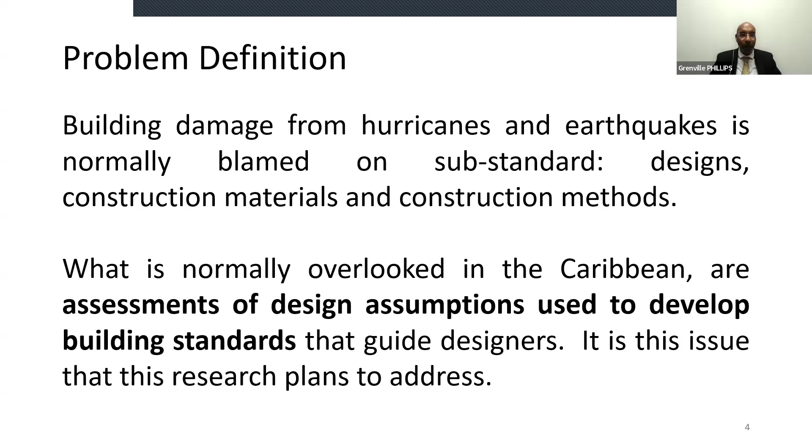Over the past 30 years, there have been several hurricanes and major earthquakes that have impacted masonry walls and houses in the Caribbean, and there is now sufficient data to identify critical design assumptions that may have inadvertently resulted in significantly under-designed buildings.

Then you have to identify the aim. What is it you're trying to do at the end of all of this? My aim was to propose design recommendations to reduce the structural vulnerability of masonry houses in the Caribbean to damage from hurricanes and earthquakes. And you must know there's a lot of advice given in the codes. So this was my aim.

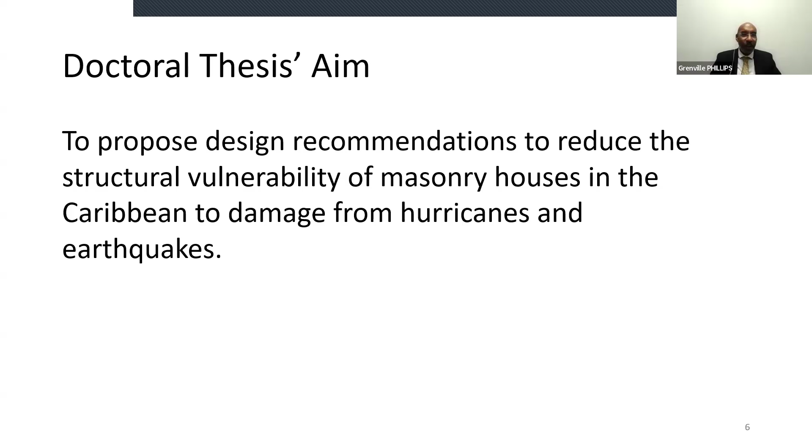Then you have to explain what method you plan to use to achieve that aim. Critical design assumptions were identified during damage assessments following recent extreme events, and they are the basis of the 4 research projects that comprise this thesis.

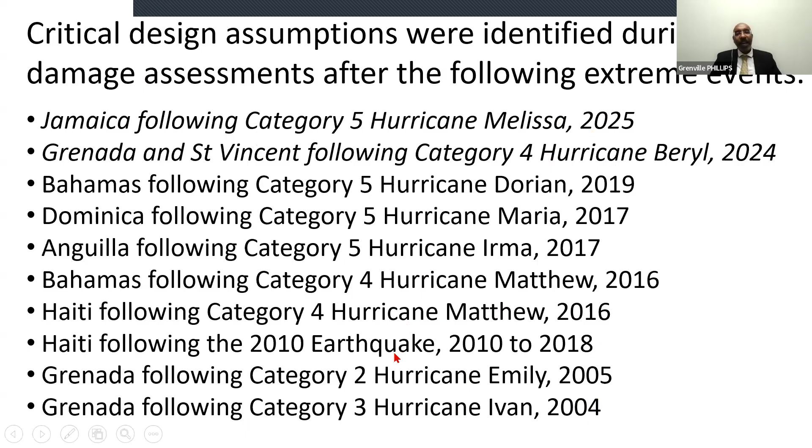I've started doing damage assessments from hurricanes in 2004. The last two are in italics because this happened after the doctorate, but those are the ones that I assessed. So it's quite a body of evidence that I can use for the doctoral program.

Since you're doing a set of research papers, essentially, they have to tell a story. So you then develop some story. Why question design assumptions?

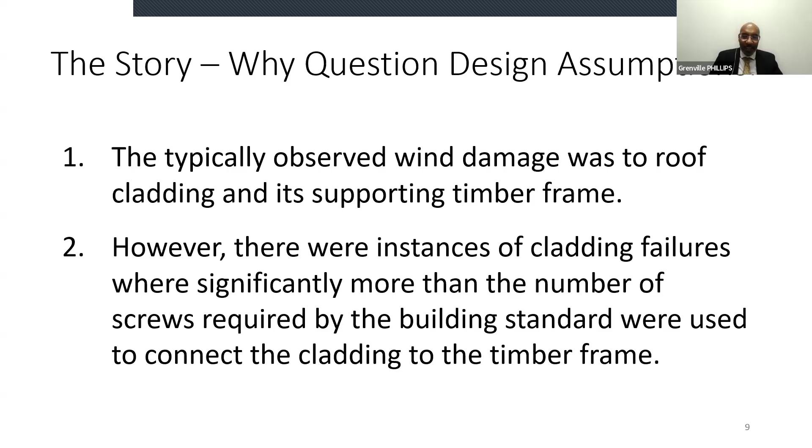The typically observed wind damage was to roof cladding and its supporting timber frame. However, there were instances of cladding failures where significantly more than the number of screws required by the building standard were used to connect the cladding to the timber frame. Here's the example - this is a school. It still had the ceiling in under the gable end, but screws at 3-inch centers. So more than that is required.

Such evidence suggests that in addition to examining construction errors and structural engineering design errors, the assumptions used to determine the structural design of the cladding and timber frames should also be examined. Since persons normally build what they can afford, the assumption that building a house roof to survive a Category 5 hurricane is generally unaffordable to homeowners should also be investigated. So I'm sort of telling the story of why I'm looking at cladding and looking at timber frames and also looking at affordability.

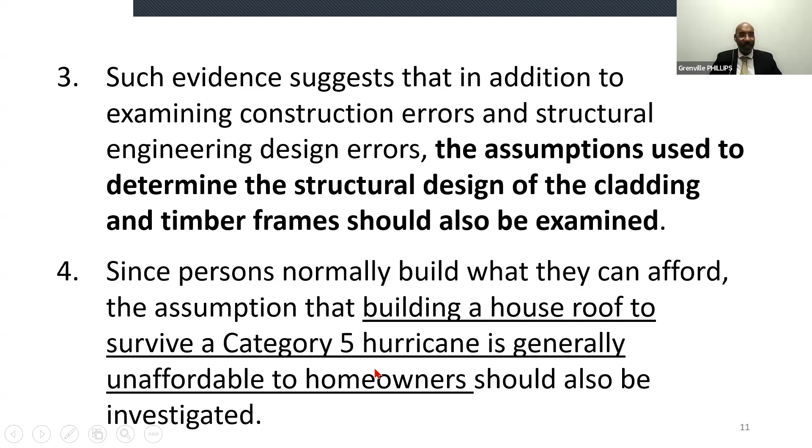The typically observed earthquake damage in Haiti was to unreinforced masonry walls. The type of masonry constructed was generally unreinforced confined masonry. Given that both confined and reinforced masonry are used in the Caribbean, and that confined unreinforced masonry is being promoted as the superior masonry solution to seismic loads, both methods' response to seismic loads should be examined.

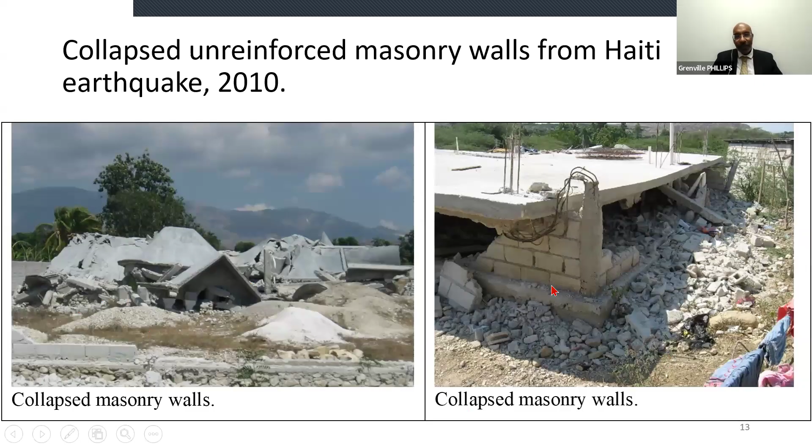So this is Haiti, where walls collapsed - they were unreinforced. And here, collapsed unreinforced masonry walls, they did have these column stiffeners, but still the walls collapsed.

The design assumptions I came up with are: hurricane wind loads can be applied statically - that's a design assumption in our codes. Second, hurricane wind loads are of short duration, as stated in our codes. Third, the construction cost of timber frame roofs to survive known Category 5 hurricanes is unaffordable for most homeowners, which was almost common knowledge when I was doing the doctorate. Fourth, confined masonry performs better than reinforced masonry under seismic loads, as stated in their codes.

To test these assumptions, the research was divided into 4 work packages, which are the thesis's research projects. I'll go through them. This is research project 1: dynamic wind loads on roof cladding. That's the title. Then you list the design assumption: dynamic loads on cladding can be applied statically by applying an increased factor.

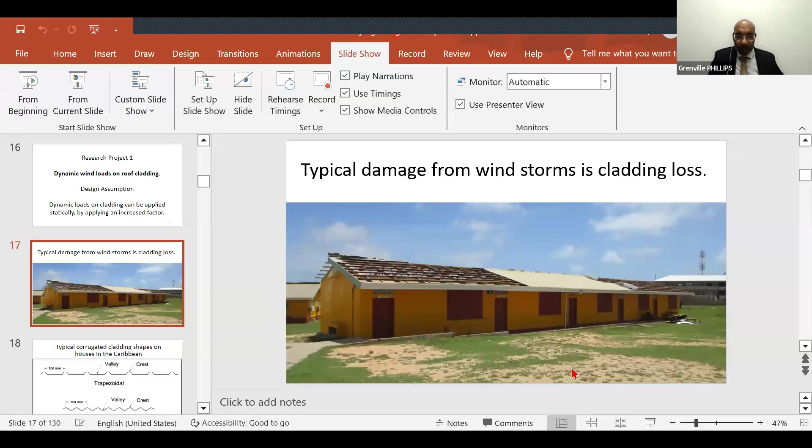The understanding is that a wind load is applied as a wind pressure against a wall. To deal with the dynamic wind loads - dynamic wind loads are usually gusts - that dynamic load is applied statically by applying a factor to your load, usually a factor of two. Still applied statically, not dynamically. So there's basically a doubling of the load.

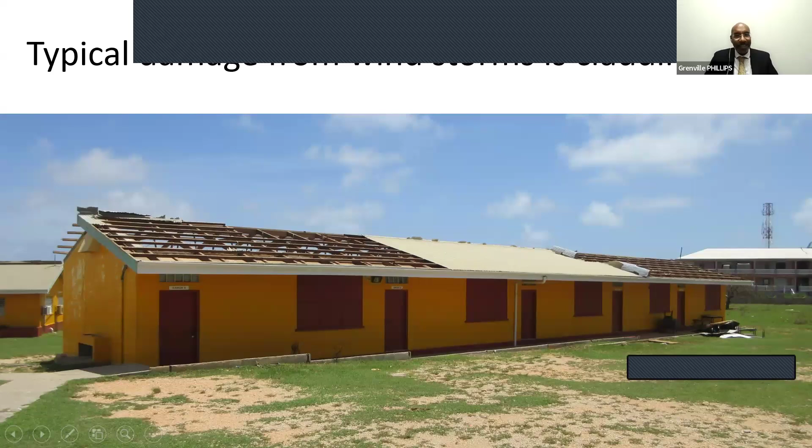The method: damage predicted from an equivalent static application of loads came from wind tunnel tests described in the American Society of Civil Engineers standard ASCE 7-16, done in 2016, was compared with actual damage from Category 5 hurricanes. So we're comparing the predicted from the code to the actual from an actual event. The predicted damage was to the high pressure end zones of the roof and to the cladding. Possible explanations for failures significantly above those predicted were identified and assessed for their likelihood.

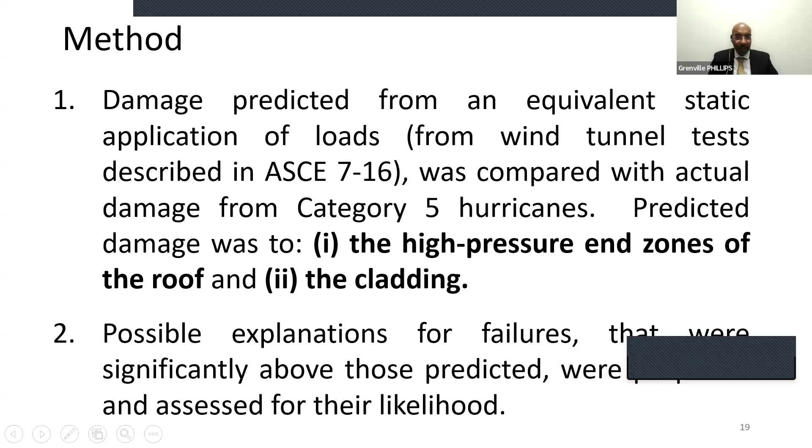Looking at the high pressure end zones - this is a gable-shaped roof. According to ASCE 7, we have an interior area which attracts some high wind pressures. Then we have the ridge, the eave, and the gable end, which attract higher wind pressures. And then we have these areas in black that attract the highest wind pressures.

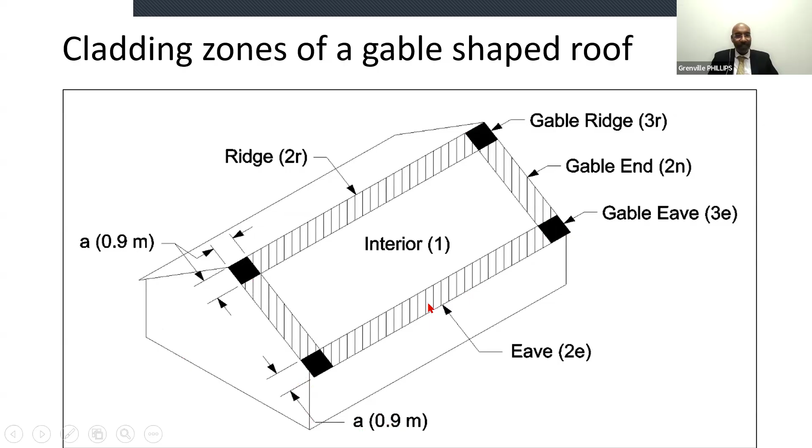To identify the dimensions of these areas is A. Once the width is less than 9 meters, A is 0.9 meters. So we know what the areas of high pressure are, and therefore you attach more fixings, more screws to those areas. For the frame, the timber frame, the area is 2A - that's the area of higher wind pressure.

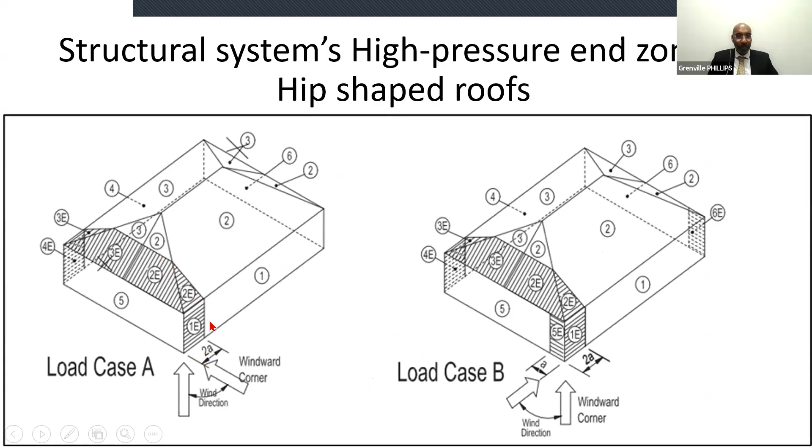In a hip-shaped roof, again 2A is the area where the higher wind pressures are. These figures show a 2A dimension width of a high pressure end zone of the building. The least horizontal dimension of most houses in the Caribbean is rarely more than 9 meters. Therefore, most houses will attract an A value of 0.9 meters, resulting in a minimum end zone width of 1.8 meters.

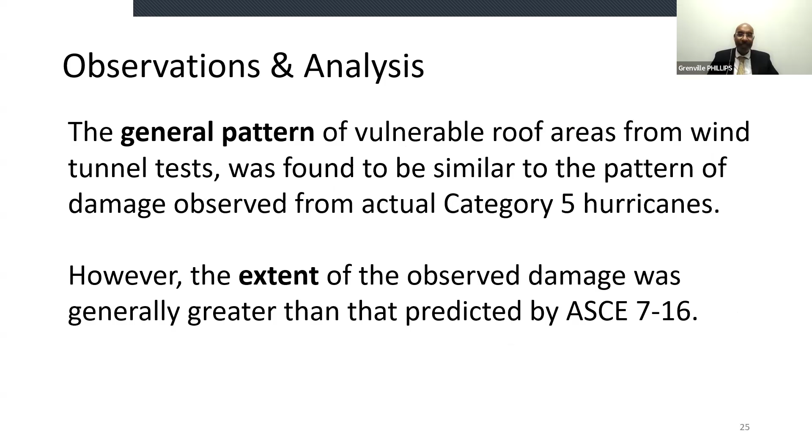The observation is that the general pattern of vulnerable roof areas from wind tunnel tests was found to be similar to the pattern of damage observed from actual Category 5 hurricanes in the field. However, even though the general pattern was similar, the extent of the observed damage was generally greater than that predicted by ASCE 7-16 for cladding. So the pattern of damage is similar, but the extent was 2.4 meters, not 0.9.

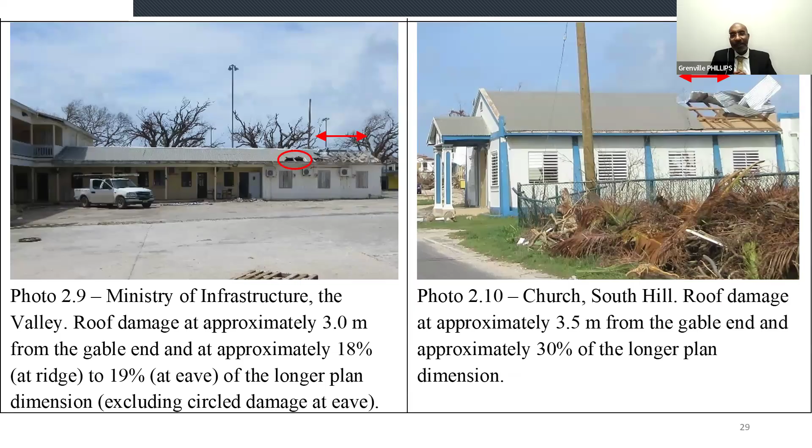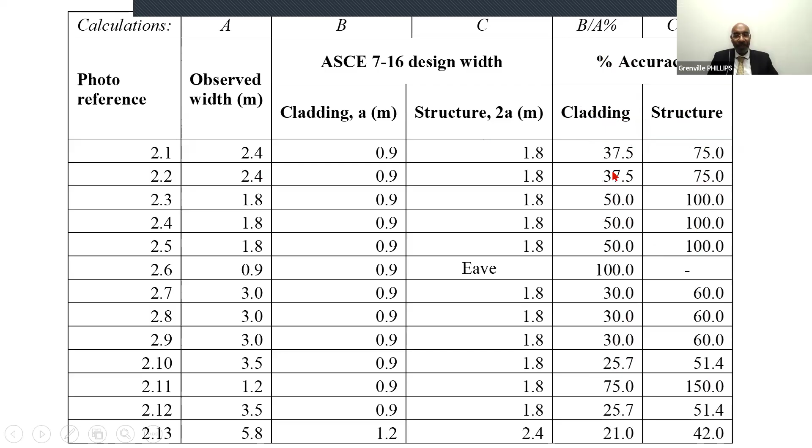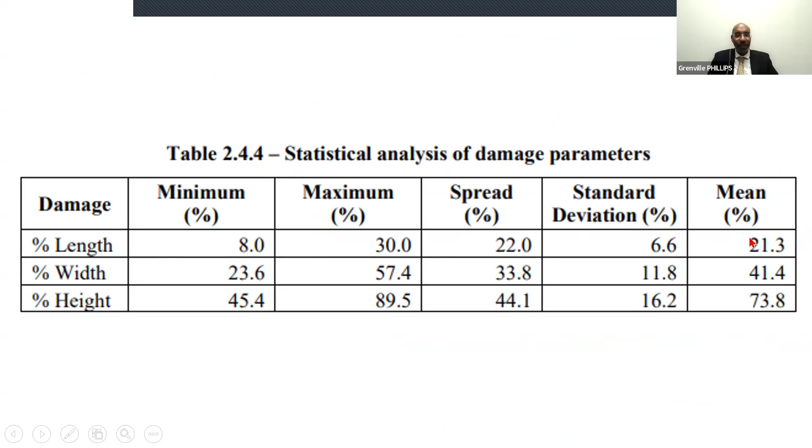So looking at the percent damage versus the height, width, and length, try to come up with a better predictor. This one seems to be the better predictor, where we're looking at the length. This is the height, width, and length, and you want something with a lower spread — that gives more confidence. Looking at it, we see a lower standard deviation and lower spread for the length, so selecting the length and using 20%, the mean value, seemed to be a better predictor.

So the recommendation was that the current method of determining the extent of the high pressure end zone in rectangular buildings defines this end zone distance as a function of the smallest horizontal dimension — the width, the length, and the height. A new parameter and end value was proposed for identifying the likely extent of the vulnerable roof area for hurricanes, namely 20% of the building's longest horizontal dimension for a single-story building. That was the original contribution to that part of the project.

The main focus now was the cladding. A case study was done in Anguilla under Hurricane Irma when the Barbados team was there.

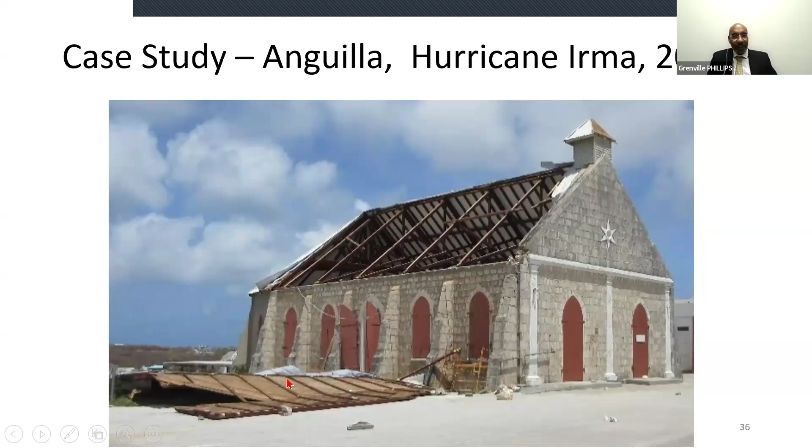They observed four failure modes. The first: the metal cladding tore and pulled over the screws — it tore, and the cladding pulled over the screw that was there.

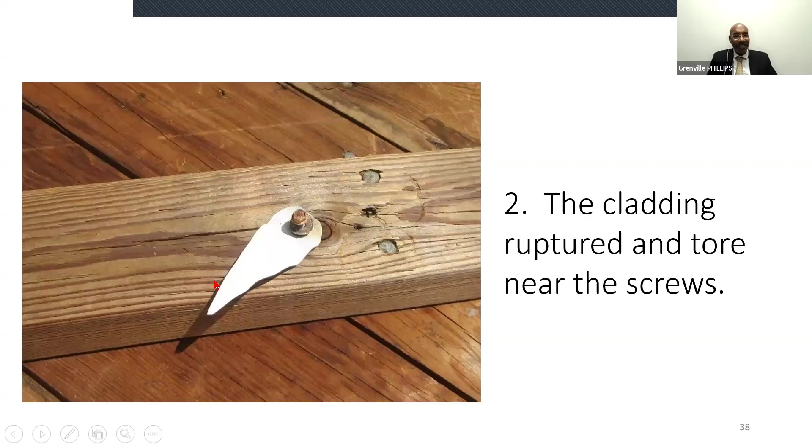The second type was that the cladding ruptured along this edge and tore near the screw. I've seen this pattern generally wherever we go to look at hurricane damage, connected to the purlin — a rough tensile ruptured edge and a smooth sheared edge, about 14 millimeters on this sample, with a few samples collected.

The third mode of failure was that the screws pulled out of the supporting timber purlins — there's a screw there, but it pulled out of the timber purlin without tearing the cladding.

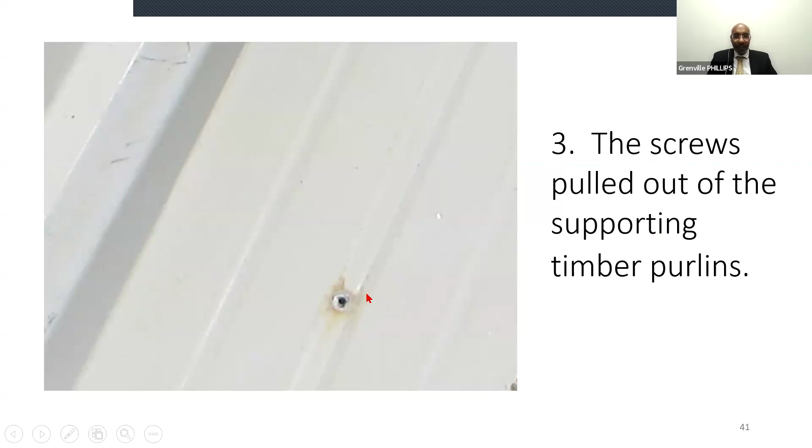The fourth mode of failure was that the cladding stitching screws pulled out of the supporting metal cladding. This one was below, there was one above, and it tore out of this. Since the evidence was there, I was able to identify all the failure locations.

According to the code, the predicted damage was at the gable ends and corners — the gable ends and corners here, at the ridge, and the corner at the eave. That's where the damage was supposed to be according to the design, and there was supposed to be no rupturing at all.

But the observed actual damage from the event was that sections of roof failure occurred all over the roof — not 11.8%, but 80% of the roof, and not 0%, but 5%, 20%, and 40%.

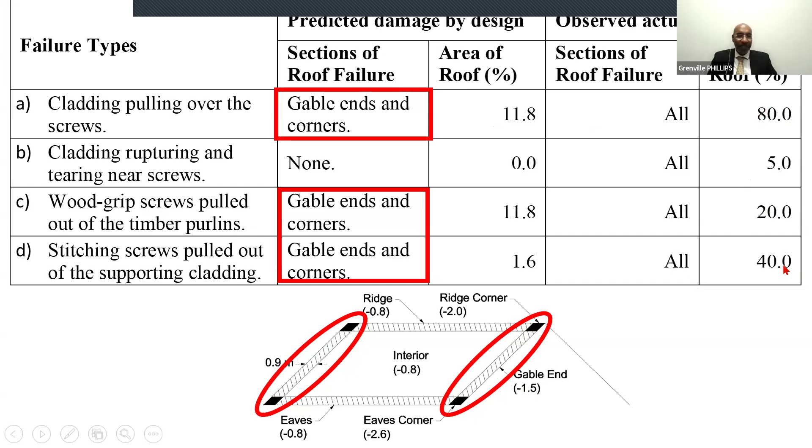So then you come up with an explanation. A normal explanation for unexpected cladding failures would be weakened component materials and underestimated applied loads. However, the materials were observed to be in fair condition — even the screws were not badly corroded. They were in good, or fair, condition, though not new screws.

So dynamic loads are determined, in this case, by taking a static parameter — the pressure and two coefficients, exposure and shape — and multiplying by a dynamic parameter: 2 for the structure and 2.5 for the cladding. That's how we get the dynamic load, basically doubling it for the structure and increasing it by 150% for the cladding.

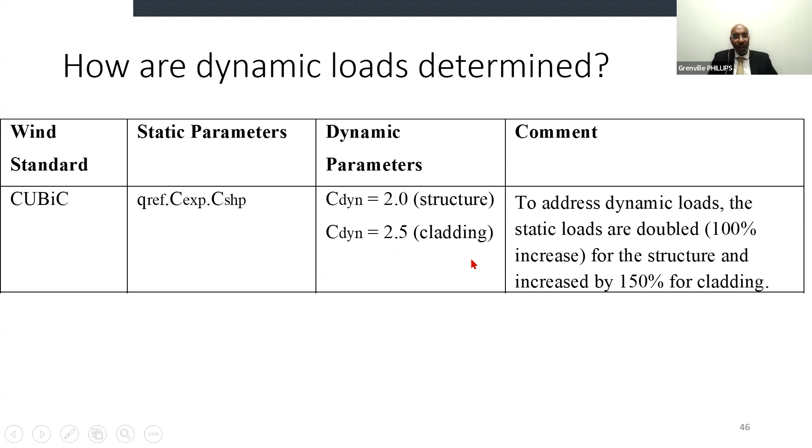That seems reasonable. In ASCE 7-10, you had the static pressure parameter, but the difference in gust effect factor and external and internal pressure coefficients tends to be less than 2 for the interior and greater than 2 for the remainder, so you multiply by a gust effect factor. Then in ASCE 7-16, it's the same, but they introduced an elevation factor, which reduced with height — so the higher you go, the less pressure.

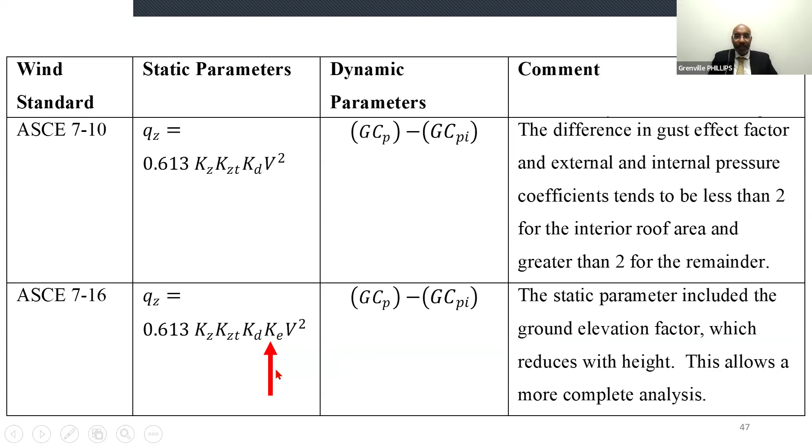So the static wind speeds required to overcome the load resistance of interior screws. Calculating what the wind speeds would have to be to overcome the four modes of failure: 625 kilometers per hour, 1,683 kilometers per hour, 383 kilometers per hour, and 783 kilometers per hour. These are significantly greater than the 376 kilometers per hour from Hurricane Allen in 1980, which was the greatest one that we had. So we certainly didn't underestimate the load.

But clearly it could not have been just the wind because we didn't have these gusts. So the static application of the wind loads could not explain the observed damage. The damage can be explained by the dynamic response of the building's materials to dynamic wind loads.

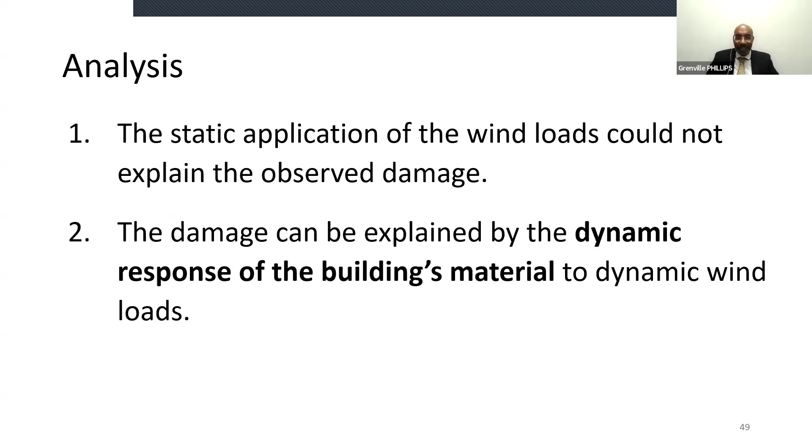So the effect of dynamic wind loads: the cladding is deformed and it pulls over the screw, the cladding ruptures and tears, and the screw is gradually pulled out of the supporting timber. I'll show you examples of this.

If we space the screws 1 foot apart, 300 millimeters apart, and these ridges are 6 inches apart, then during the suction forces this rises, then falls, and rises and falls. It flutters, and as it flutters, this being the deflected shape, there's increased stress at the screw hole, and that explains why you will get that tearing, the pulling over, and this rupturing and tearing.

Not by the static application of the load, but the dynamic response of the material.

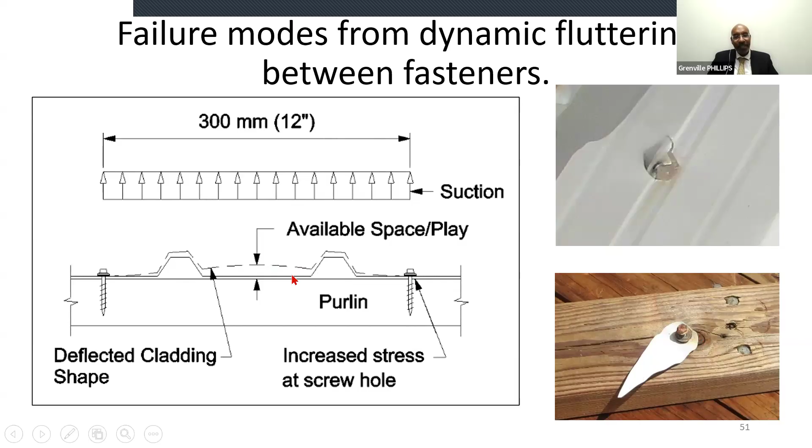And here now, if you put a screw in the middle but not tighten it, then there will be fluttering, and the fluttering causes this to keep knocking it out, until it's gone, knocked out completely, once you have that play, once you have space for play or movement to occur. And that explains the loss of the screw.

And once the screw is gone, then increased stress near this nail, now this screw, and we get the two from the previous one.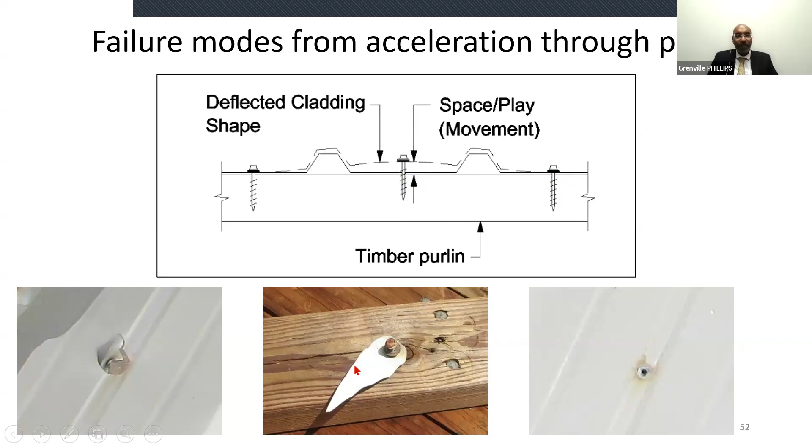This is an example observed in category 4 Hurricane Beryl, where this one in the middle is knocking out, and there's a nail actually between these two which are fixed in place. This one is gradually coming out, while these two are fixed in place.

So you can appreciate you don't want to have flutter at all. Once you have this fluttering, it's going to keep hammering the nail out. This is the screw where it's hammering it out, and you have a little dimple, a little dent in the sinusoidal cladding, again on its barrel.

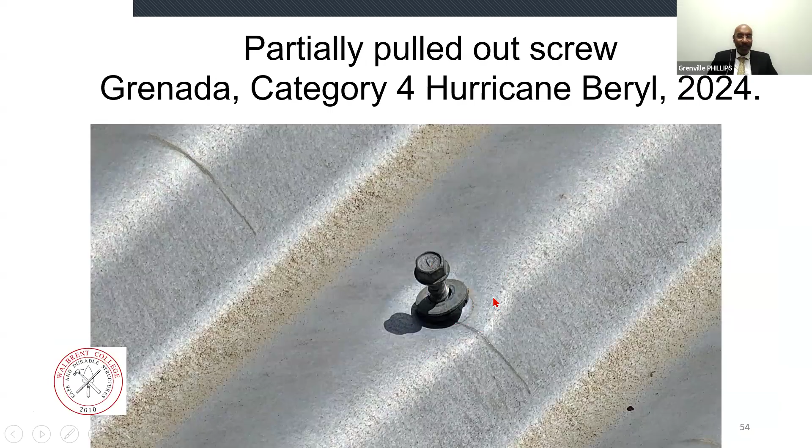So the original contribution to professional practice is proposing a new design approach. First, design the joints to satisfy the equivalent static loading requirements of the building standard. You must comply with the building standard, you must comply with the design standard. That in some cases is a legal requirement.

But if you don't, then if something happened, someone's going to ask you the question: did you comply with the code? You must be able to say yes. So the first piece of advice is comply with the code.

But after you have complied with the code, number two: assess and address the vulnerability of the joints to accelerated cladding movement from dynamic loading. So the cladding should be restrained where possible to reduce any play and the risk of the cladding's acceleration through that play.

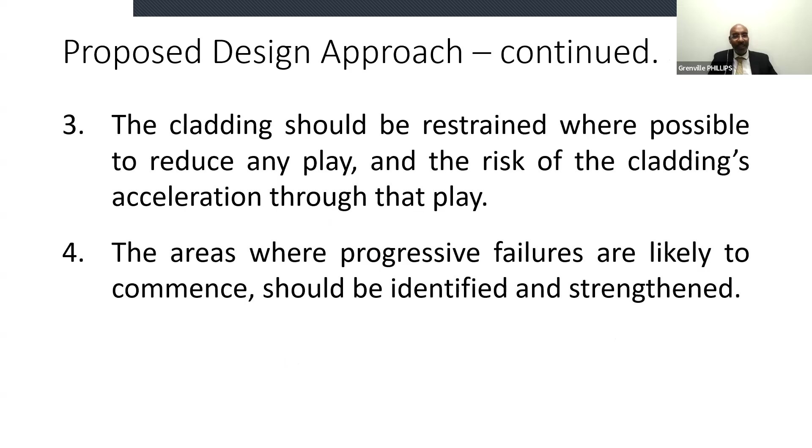And the areas where progressive failures are likely to commence should be identified and strengthened. So this is a result of that.

So even though, according to the code, in the interior you can put a screw at 1 foot apart or 300 millimeters apart, because of the dynamic behavior of the material, the response of the material, and therefore the loss of the screws and the increased stress around the screw at the cladding, every valley should have a connection. And the screws are not expensive, so this should not cost that much.

At the gable ends, eave, ridges, hips, and valleys, where the pressures are higher, then you space them at 75 millimeter centers for a category 5 hurricane.

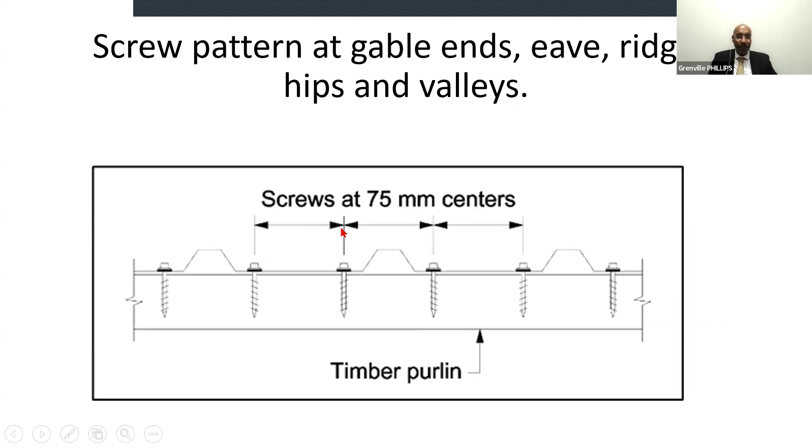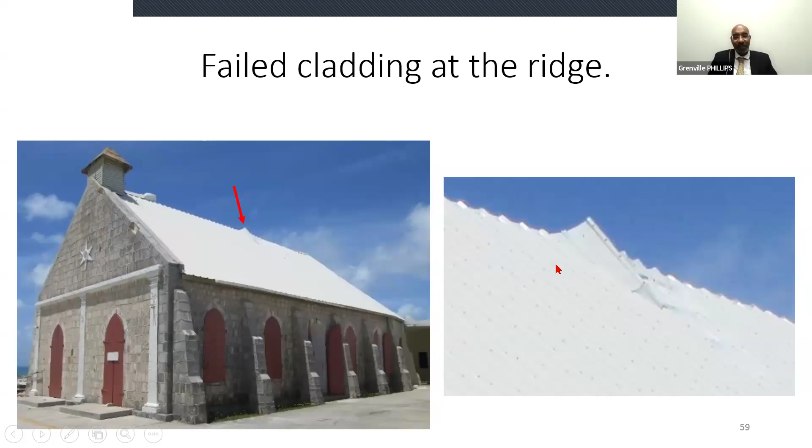Now, I went looking and I found generally, especially when you go further away from the epicenter, or where the storm made landfall, you start to see where the vulnerable areas were or are. And again, it's generally the stitch and screws. There's movement at the stitch and screws, and the failure starts there, and then when one is gone, the rest go. So you want to stop it at the stitch and screws, the vulnerable location.

And therefore, at the stitch and screws, you put screws on either end. But again, if you put a screw on either end, then you have a long distance here, creating fluttering. So you put one at this end as well, the same way that you did in 3-inch spacings, and that should secure that stitch and screw vulnerable location.

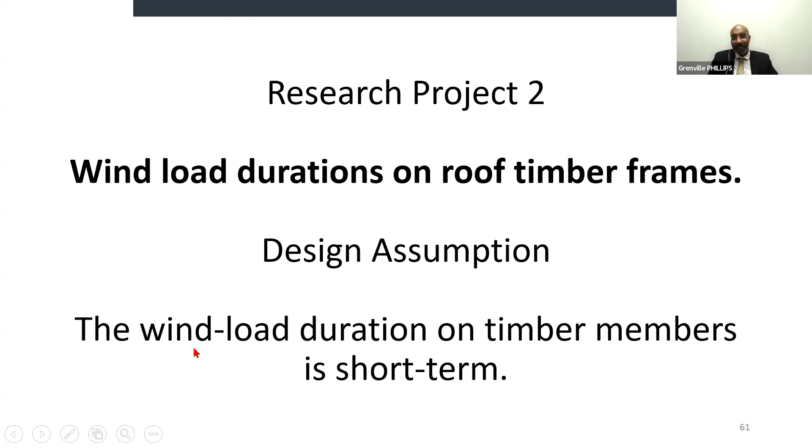So the research project number 2 then, wind load durations on roof timber frames. The design assumption is that wind load durations on timber frames or timber members is short term.

Another typical windstorm failure is the timber frames that support the roof cladding. Timber can resist significantly greater than its reference maximum load when those loads are applied for short durations.

It's a really wonderful quality of timber, where the shorter the load, you can increase the reference strength to accommodate those shorter duration loads. So building codes assume that the wind loads are short duration events, so timber design strengths are artificially increased.

And is that assumption that was investigated. This is important because the reference resistance of timber is increased by multiplying it by a load duration factor if the load duration is short.

So if it's a permanent load, multiply it by 0.9. But if it's 10 years, then it's the reference strength that they determined in the lab by loading the timber, and that's usually for live load. You apply a load duration factor of 1.

But if it's a 2 month load, and they tell you that's snow, then you increase it by 15%, 1.15. And if it's a 7-day load, and the example that the code gives is construction, a construction load during construction, then you increase it by a quarter. You can increase the timber strength by 1.25.

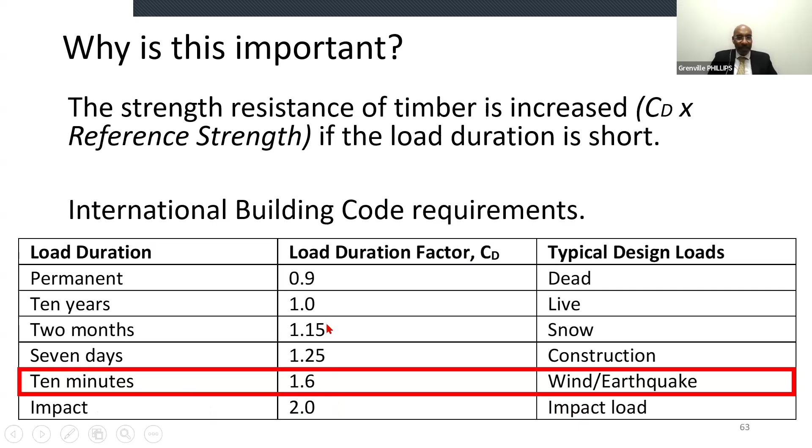And again, that's a wonderful aspect of timber. So curves were done so you can identify these things.

So that is normal, 10 years. That's wind and earthquake combined, 1.6.

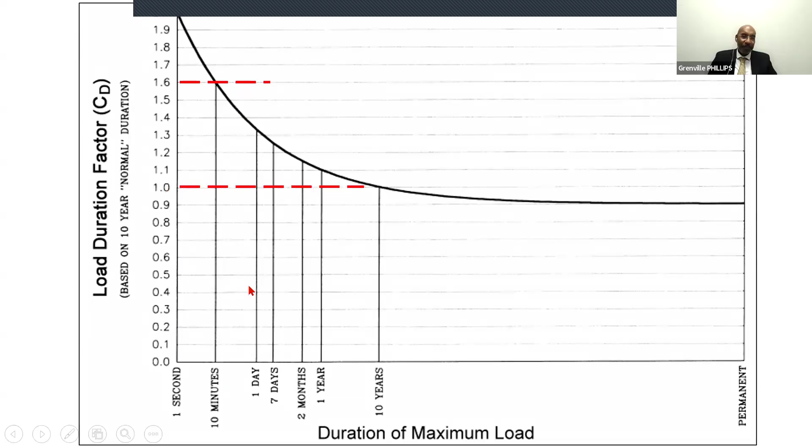So the International Code Council, the International Building Code references the American Wood Council, and they state the 10-minute load duration factor, because we're looking at wood, is conservatively estimated as the adjustment for the cumulative effect of these two, wind and earthquake, load conditions. So they're quite confident that it conservatively estimates those two.

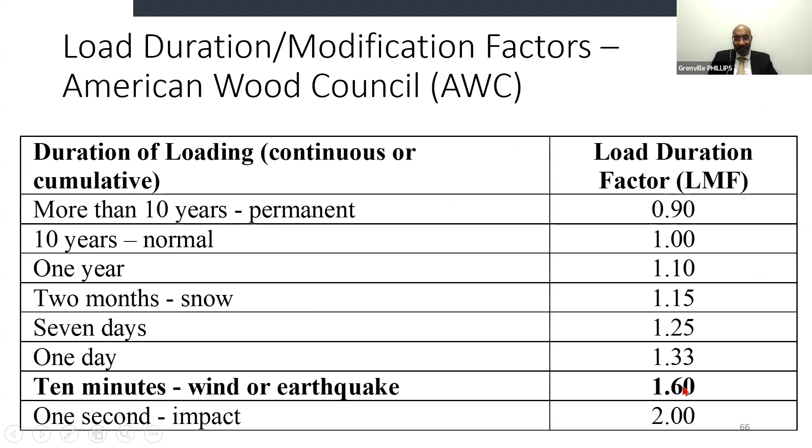So the load duration modification factors, there are modification factors in the American Wood Council, in the International Code, in the ICC. Yes, load duration factor, it's CD, but this one is LMF. Same thing, 10 minutes for wind and earthquake. So I guess they got it from the American Wood Council.

So the method was to determine the durations of both tropical storms and hurricanes that impacted the Caribbean for 50 years, typically the building's design life, and compare the cumulative storm durations with the wind load durations recommended in timber design standards.

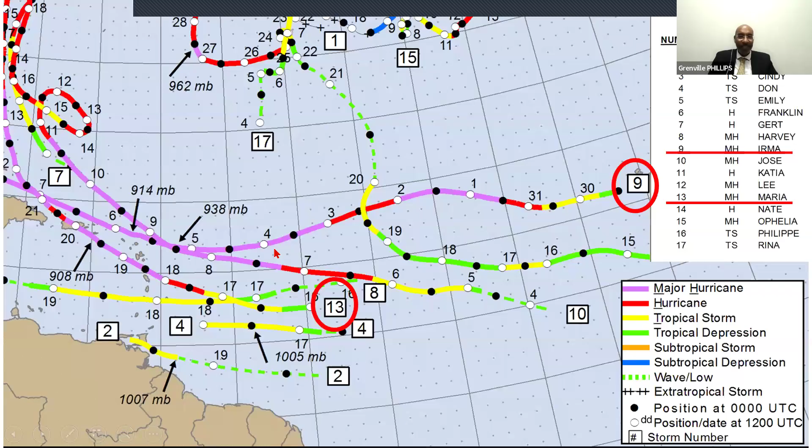So knowing where it was and the direction that it was and the speed that it was, and this is the island, then you know the duration because you know the distance, and the distance divided by the speed will give you the duration.

So doing that for tropical storms from 1970 to 2019 for all Caribbean countries, you can get the number of storms, the impact hours of those storms, and therefore the impact days, with a day being a 24-hour period. And doing that for hurricanes as well, for all Caribbean countries.

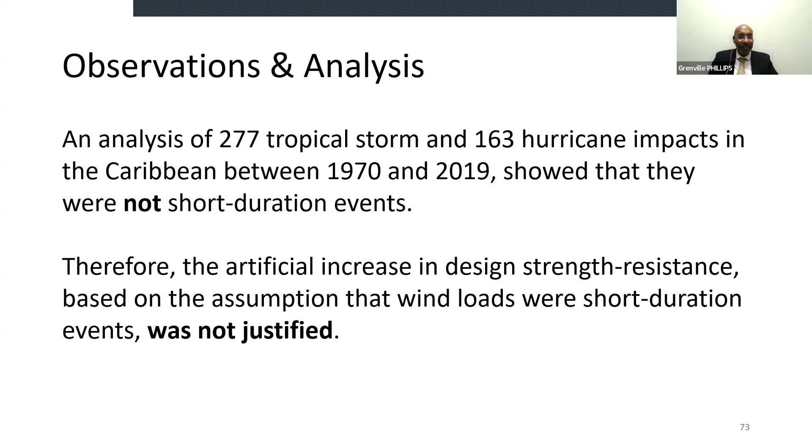So the observations and analysis of 277 tropical storms and 163 hurricane impacts in the Caribbean between 1970 and 2019 showed that these were not short duration events. Therefore, the artificial increase in design strength resistance based on the assumption that the wind loads were short duration events was not justified in the Caribbean.

So the storm duration for tropical storms is 20 days, and for hurricanes between 0.2 and 5.7 days, depending on the island, with a mean of 4.9. So 10 minutes wasn't cutting it, it's more like 7 days for a hurricane.

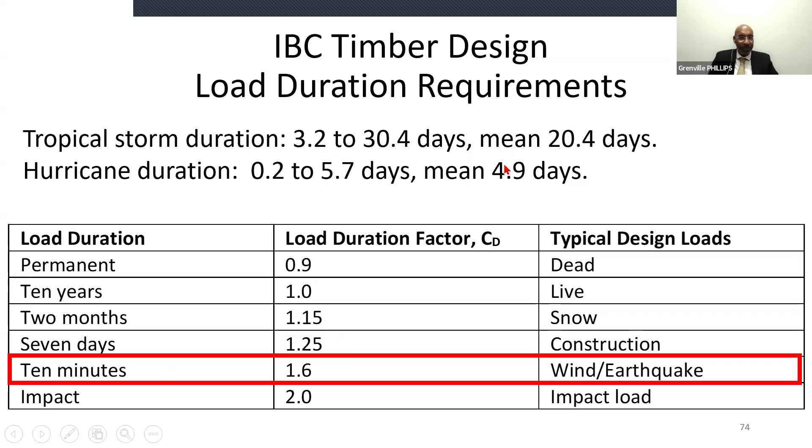The recommended wind load duration factors for the American National Design Specification of Wood Construction, typically used with ASCE 7, or Eurocode 5 Design of Timber Structures, or the Canadian Standards Association Engineering Design in Wood, or CP 112 1985 Structural Timber: instead of 1.6, if you're using a tropical storm, 1.15, or if a hurricane, 1.25. You should be using 1.25, and that should be in our Caribbean application documents.

The Eurocode gives you 1.1 or 0.9, should be 0.8 for tropical storms, or 0.9 for hurricanes. The Canadians use 1.15, that's correct. But for tropical storms it's 1, and for CP, not 1.33, but for hurricanes 1.25. So you don't artificially increase it by 33%, but by 25%, if you're using the methods in CP.

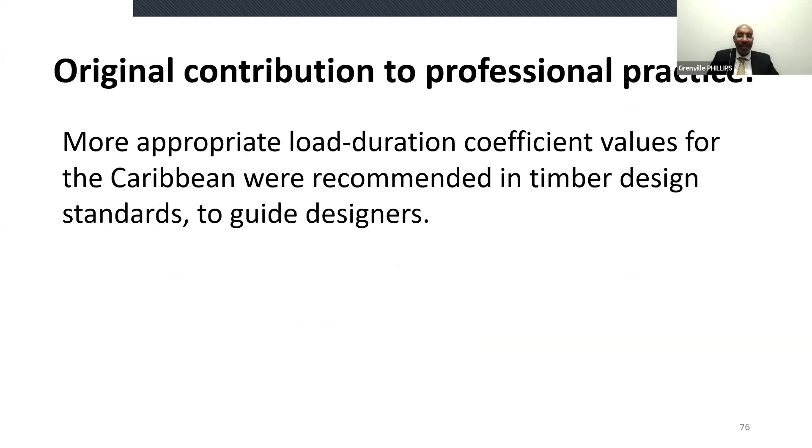So the original contribution to professional practice is that more appropriate load duration coefficient values for the Caribbean were recommended in timber design standards designed to guide designers.

Then research project 3, the affordability of Category 5 hurricane resistant house roofs. The assumption made was that the cost to build a roof to survive Category 5 hurricane winds is unaffordable to most homeowners. So we investigated that assumption.

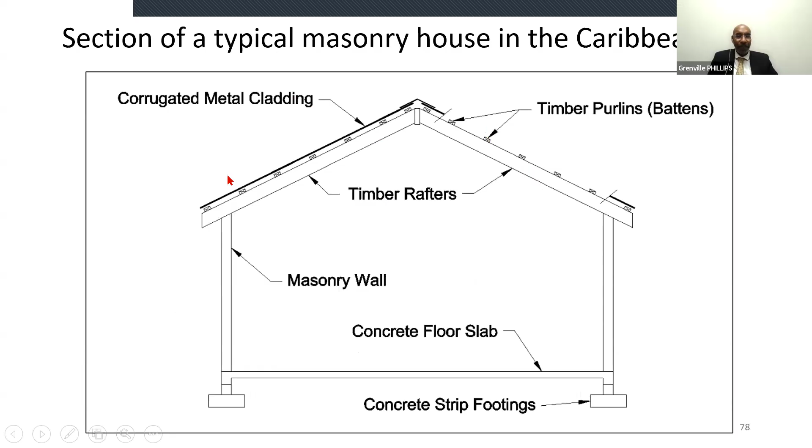That's a typical roof on a masonry house, with rafters, purlins, and roof cladding. The method was to select three common house roof areas with hip and gable shaped roofs of varying roof slopes, 0 to 45 degrees, and design the roof to resist both Category 2 and Category 5 hurricanes. Category 5 being 225 miles per hour, 3-second gust hurricane force winds.

We calculated the amount of construction materials required to construct different roof shapes and spans. The reason for going to Category 2 and Category 5 was to produce the most conservative result, and to assess the damage risk by determining the frequency of windstorm impacts in Caribbean states over the past 50 years.

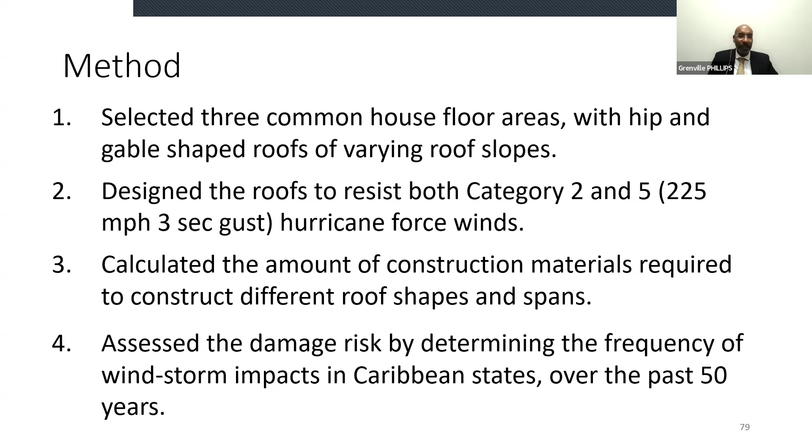Now, I've updated this because it is significant, and I'm doing postdoctoral research trying to find out why this happened, and I believe I found out why. Before 2000, we tended to have 8 Category 5 hurricanes in the Caribbean every 30 years. There were 8 between 1910 and 1939, 8 between 1940 and 1969, and 8 between 1970 and 1999.

But then suddenly after 2000, we had 8 in 5 years, not 30, 8 in 5 years. Then there was 6 in 4 years, and we were monitoring this little cluster developing. But right now, after Melissa, there's 7 in 4 years. Something is happening with our weather system. The climate has changed, definitely.

This is incontrovertible proof the climate has changed. The only thing is, who is changing it? Well, it seems to be changed by humans - it's man-made climate change, I believe. But which men? Who are these men that are changing this climate? I think we can identify them, but that's a research paper. Clearly, it's changing, and this is now the pattern.

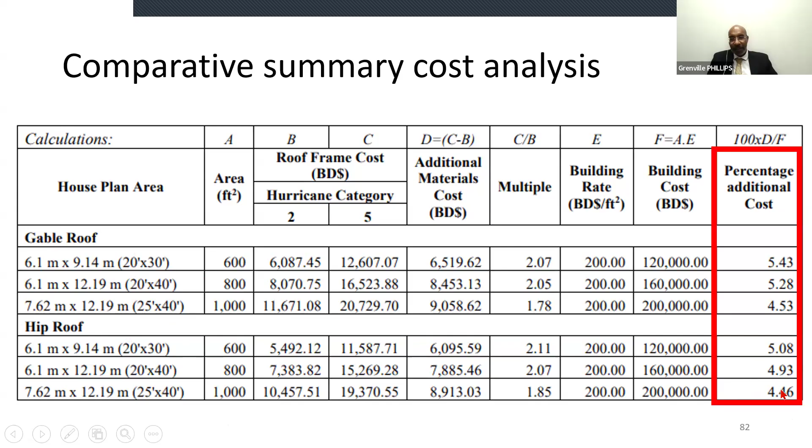Looking at a cost per square foot of $200 a square foot Barbados dollars, you end up with about 5%. Looking at a gable roof for a 600, 800, or 1,000 square foot house, various roof shapes, and hip roof, same thing, about 5% - that was for the small house. For the larger house, it goes down to 4 to 4.5%, so there are benefits to building a larger house.

Observations and analysis: the additional cost of construction materials for a roof to survive a Category 5 hurricane over Category 2 was within the normal contingency amount for a house building project. And the risk of being impacted by tropical storms and hurricanes several times during the 50-year design life of a house was likely, because we looked at the frequency, averaging 11 and a half years.

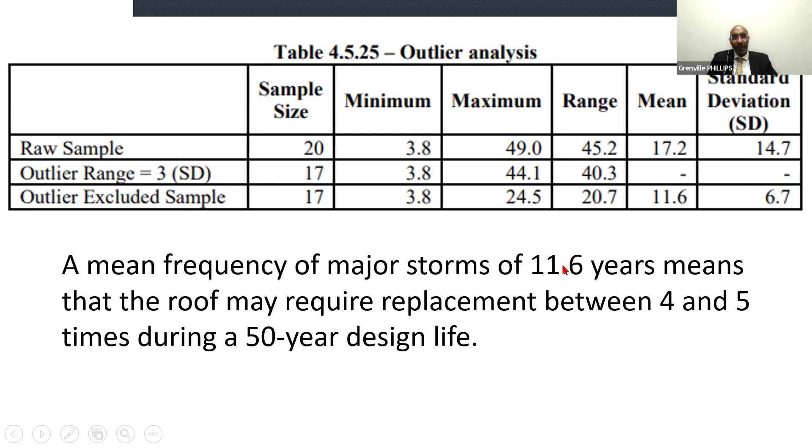So the roof may require replacement between 4 or 5 times during a 50-year design life, on average in the Caribbean. The original contribution to professional practice is that houses in the Caribbean should be designed to resist winds from recent Category 5 hurricanes that impacted the Caribbean, since it is shown to be affordable to do so. If it was not affordable to build a roof to Category 5 hurricane, then don't do it. But since it is affordable to do so, and it is, as I said, 5%, but the larger the house, and therefore the larger the building, it is even less than that.

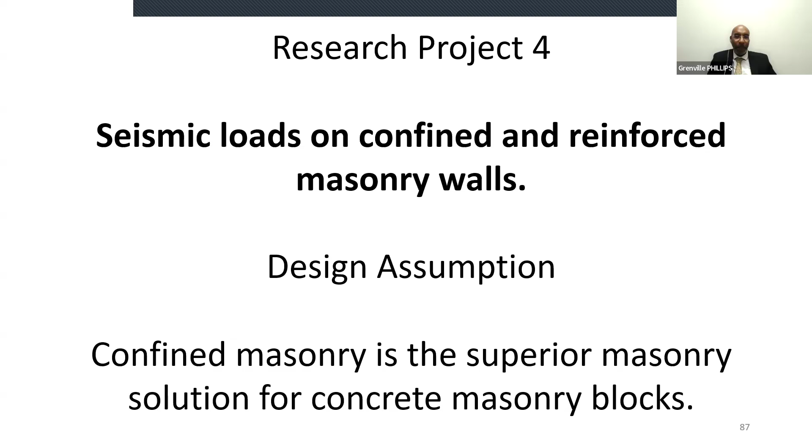The research project number 4, seismic loads on confined and reinforced masonry walls. The design assumption is that confined masonry is the superior masonry solution for concrete masonry blocks. This is important because since the Haiti earthquake in 2010, where 300,000 people reportedly died, confined masonry has been actively promoted in Haiti and around the world as the better masonry solution for earthquake resistance. There are benefits to the Caribbean region if this assumption is found to be true, or safety risks if it is found not to be true.

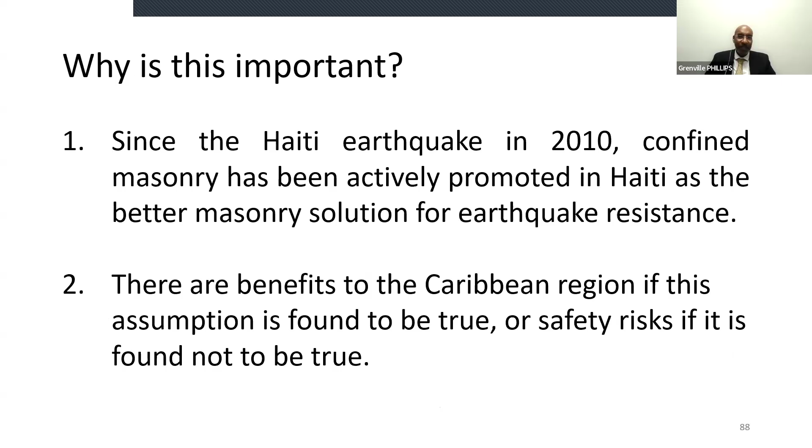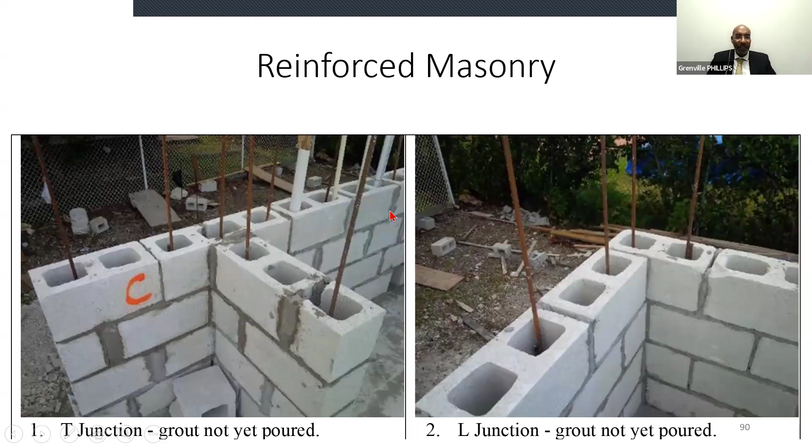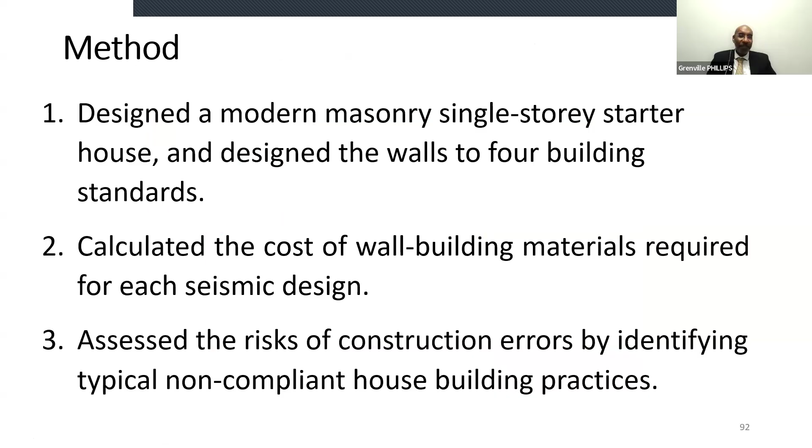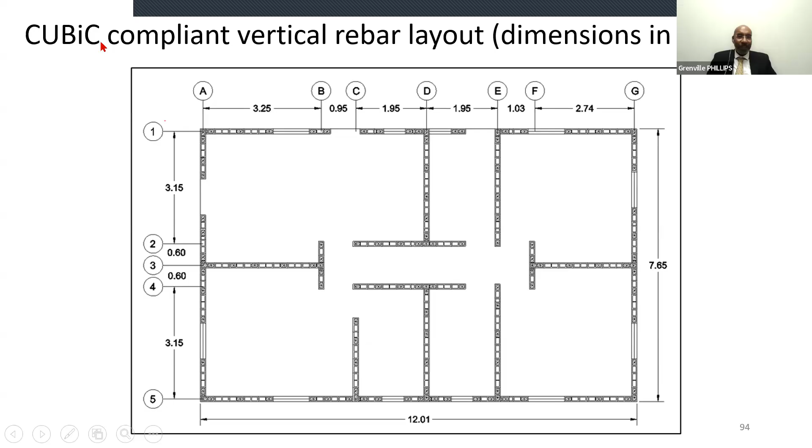Using CUBiC compliant vertical rebar layout. So usually the spacing is 800 millimeters. However, sometimes it's 600 or 400, depends on where the doors and windows are located. So you can't just say 800 and calculate it that way. You have to draw out every bar so that you can get the actual number of bars and the ties. And the Haiti Building Code, the most recent one, they space the rebar at 400 millimeter spacing and grout the entire 2 meter shear wall.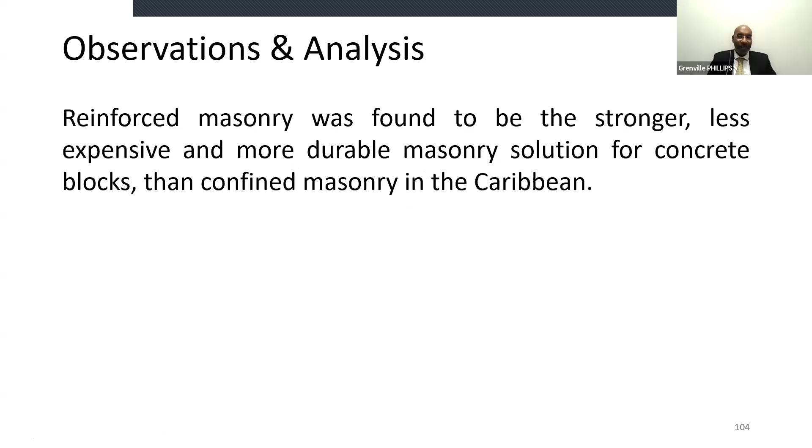I'd like to just briefly note the role of the Earthquake Engineering Research Institute. It's relevant to note the role of this institute in the recent promotion of confined masonry in developing countries. The objective of the institute, taken from their bylaws, is to reduce earthquake risk by advancing the science and practice of earthquake engineering, by improving understanding of the impact of earthquakes on the physical, social, economic, political, and cultural environment, and by advocating comprehensive and realistic measures for reducing the harmful effect of earthquakes. Article 1 is wonderful, wonderful.

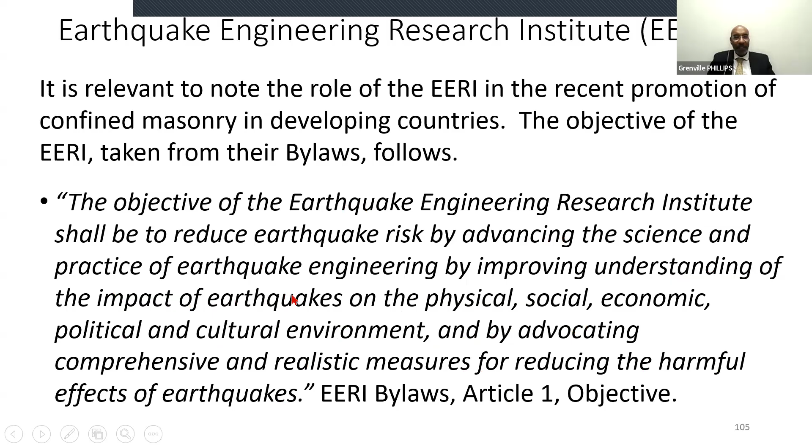In 2008, they established the Confined Masonry Network to promote confined masonry construction in seismically prone areas of the world. Before the 2010 earthquake, confined masonry was a common residential construction method in Haiti. Following the earthquake, confined masonry was actively promoted as the only masonry solution for Haiti. I was there over 12 times between 2010 and 2016 and could not get them to accept reinforced masonry. The only thing they would accept is confined masonry. And I couldn't understand why.

The international trainers recommended, and there was training Haitians as well, but others were training them as well, that only confined masonry should be taught to avoid confusing, among others, the workers, the population, other organizations, and the government.

They actually passed an edict while I was there, when they realized that I would be training Haitians, forbidding anyone but that group from training Haitians. And to their credit, the organization that brought me there said, look, we brought you and you train how you want to. Therefore, I did not comply with that edict.

But you had a couple of engineers that came down from Arup in the UK, and they were so intimidated that they spent their time there not training anyone.

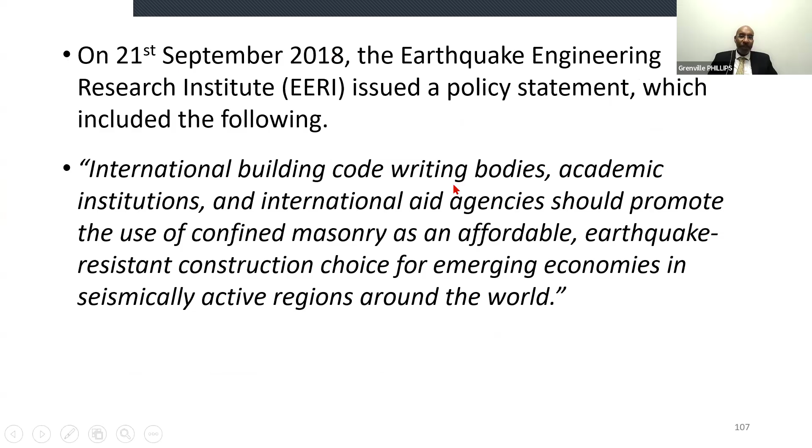In contrast, again, this is the Earthquake Engineering Research Institute while I'm doing my research into reinforced masonry and confined masonry, comparing them. In contrast, the more commonly used systems, like reinforced masonry, have proven to perform poorly in earthquakes as typically constructed. That is not true.

Agencies and international NGOs involved in post-disaster reconstruction work should include training sessions for local masons in the design or construction of confined masonry as integral components to their programs in seismically active areas. And they pursue that with zeal.

Again, reinforced masonry addresses both in-plane and out-of-plane loading. Unreinforced masonry does not address the out-of-plane loading, and that is how the failures tend to occur. Not in-plane, in-plane is okay, it's the out-of-plane. Is the earthquake shaking in this direction? That's the problem with confined masonry.

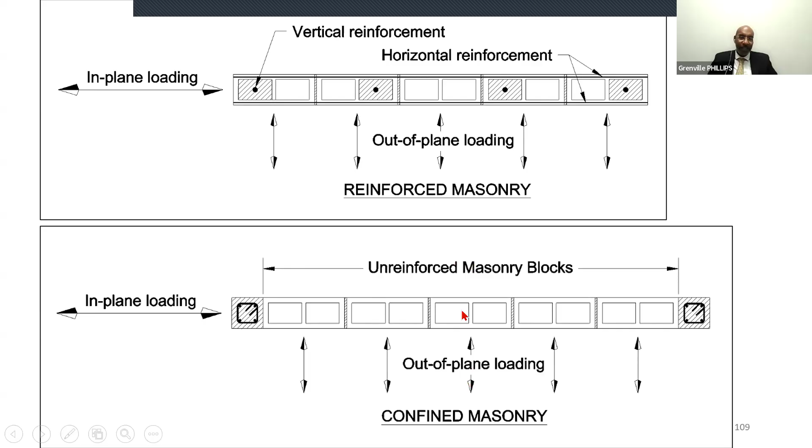While I was doing my thesis, on the 14th of August 2021, Haiti was struck by a magnitude 7.2 earthquake. Approximately 2,248 people joined the approximately 300,000 that had died 11 years before. 12,763 were injured. 53,853 houses were destroyed, confined masonry I might add.

83,770 houses were damaged. The damage occurred in the same areas where the 2010 earthquake struck, and they rebuilt them using confined masonry.

Those were unnecessary deaths. A preliminary damage assessment report was prepared by the United States' National Science Foundation's funded Structural Extreme Events Reconnaissance, called StEER.

The StEER report identified 4 building types in the affected areas: unreinforced masonry, reinforced masonry, so that's probably some of my students, confined masonry, and masonry infilled reinforced concrete frames, so the typical reinforced concrete frames that were designed and then masonry infilled.

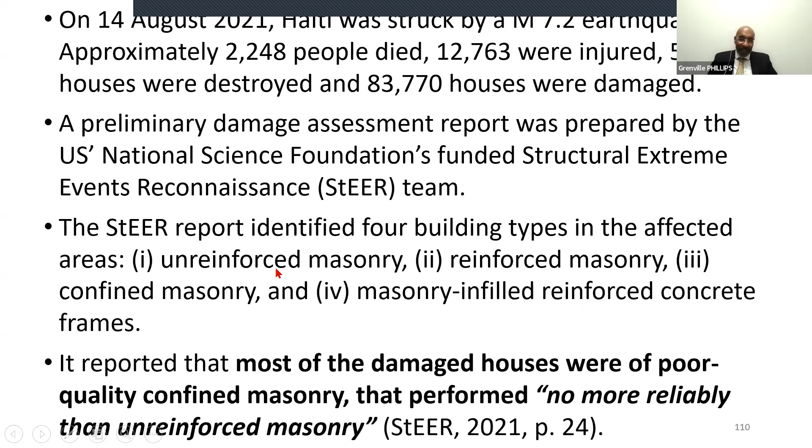I mean, it's like one person identified the damage and then it was passed on to the confined masonry network or someone to just write this madness.

As well, confined masonry is equally effective in resisting tensioning and out-of-plane failures in masonry walls under hurricane uplift pressures. The promotion of feasible earthquake-resistant implementations of confined masonry in lower and middle income countries in the Caribbean will be advantageous for advancing multi-hazard resilience. So you just throw in those phrases and hope that someone just reads the recommendations and adopts this.

Interestingly, the StEER report did not comment on the performance of reinforced masonry buildings and did not include reinforced masonry as a recommended housing solution. This ignored it completely.

So the original contribution to professional practice: reinforced masonry is a better masonry solution for concrete blocks in the Caribbean. Confined masonry is a suitable masonry solution for walls built of stones and solid bricks because they don't have cores in them that can receive reinforcing bars. And therefore, the better method for those concrete blocks with cores is reinforced masonry. But where there are no cores, confined masonry is suitable.

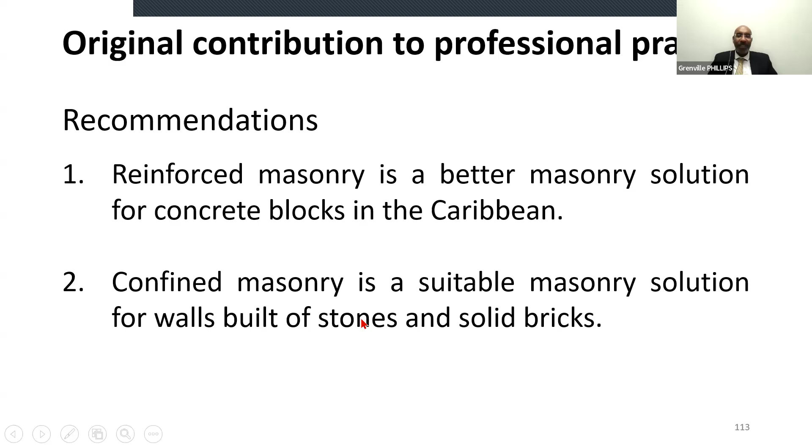So I came up with three policy recommendations. One, a residential building standard should be developed for the entire Caribbean to the same magnitude of wind and seismic loads. The wind standard should be a 200 mile per hour, 3-second gust. And masonry houses should be designed to survive both in-plane and out-of-plane loads from the magnitude 7 earthquake that impacted Haiti in 2010.

And that's it. And after going through the research, then I was awarded the doctorate.

I could let you know then that after this, I tendered on a job, the college did, and wanted to design a regional building code for houses in the Caribbean. And we completed that and also did a learner's guide, which is a user-friendly version of that standard, which has been accepted by CARICOM as a Caribbean standard. And it is the 225 mile per hour gusts.

Right? Willing to entertain any questions?

Now, for the metal, you have to examine it to see if it is reamed out. Let me see if I can show this. Let me share this again.

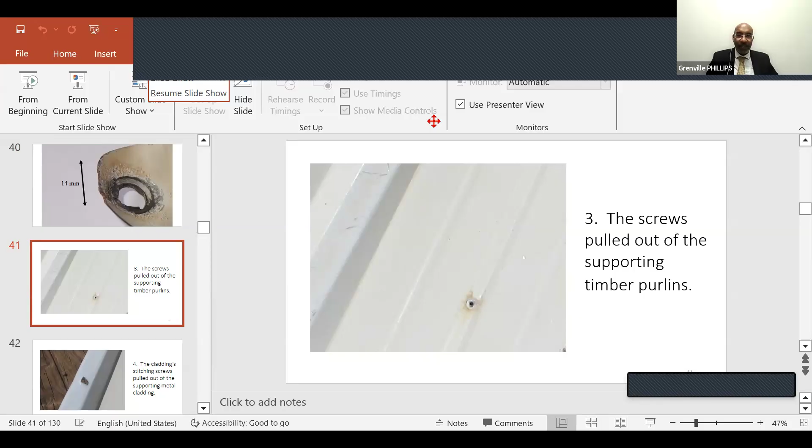Yeah, that's it. Peter, any follow-up?

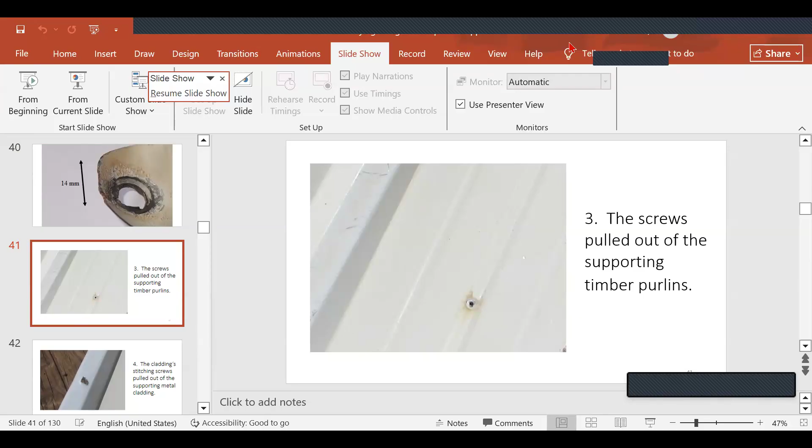I was just wondering what is your estimation of the impact of the flexure of the cladding, because the cladding itself will also flex based on what you were proposing with regards to the wind loading, the dynamic wind loads. Would you consider the cladding to still be structurally strong to support future events? Yes, because I did the check based on...

If this is the interior, according to the code, from here to here that's 1 foot centers, 300 millimeters. That's what's needed according to the code. Because of the fluttering, you then put one in the middle here. There shouldn't be much fluttering from this, right? That's the only thing left right here. But there shouldn't be much if you're fixing it here and here in the interior.

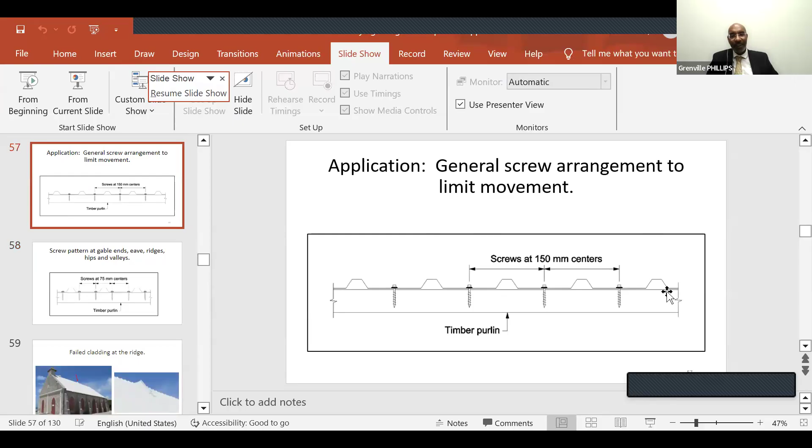Now, if it was fixed like this at the high pressure end zones, then you're going to have problems. That's why this is what you do to prevent that fluttering here. So this is not going to work at the end zones. This will, or this should, I should say.

Okay Grenville, thank you. Can you show that drawing you had of the end zones just to refresh people's mind of what you're referring to? And the next person up to ask... yes, question, go ahead.

These are the end zones here. So for a gable-shaped roof, the hatched area attracts more wind pressure than the interior, but these are the real danger areas. These black areas, the gable eave, where the gable and the eave intersect, and the gable ridge, where the gable intersects with the ridge. Those are very high pressure zones. So you definitely need 3 inches there.

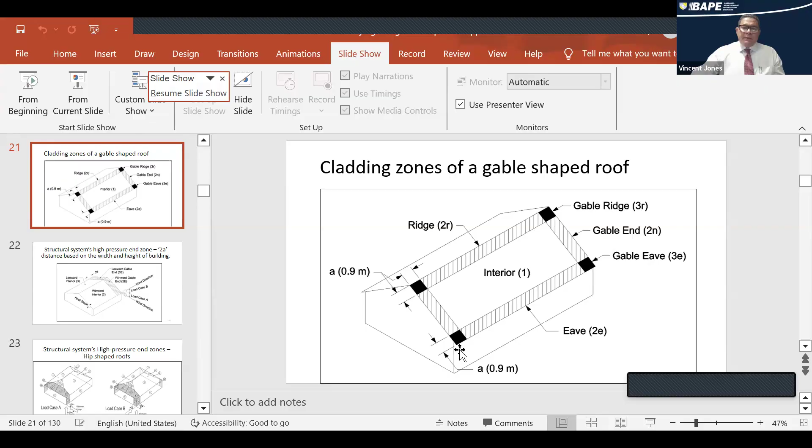Hi Grenville, sir. Thanks very much for that talk, it was very interesting and informative. I hope that you have better luck with the IStructE in the future. I cannot believe that you said that was their position, or at least they tried to get you to come together with the other society, and that's most unfortunate.

Anyway, let me just interject though. No, that's the better method. The better method is if you have two persons giving a technical opinion on the same subject, then the better route would be for them to get together and discuss the matter in an evidence-based discussion. And that's what I tried to do, evidence-based discussion. But the other side wasn't willing to. Therefore, the IStructE did the reasonable thing, which was fine.

If you cannot agree, then write two final papers on the matter, and that will be that. I may go back to them now with the additional evidence, and maybe we come up with some better guidance then for all engineers. I think that would be most useful.

My question to you is my takeaway from this is that you're coming with a twofold thing. One, you presented an argument for confined masonry versus reinforced masonry. The second is in terms of what wind speeds we should be designing to, hence the argument about category five. Because I think if you weren't making the argument for category five, and just for argument's sake you're making an argument for category one, then comparing the two methods is probably less relevant. But at category five, it becomes extremely relevant.